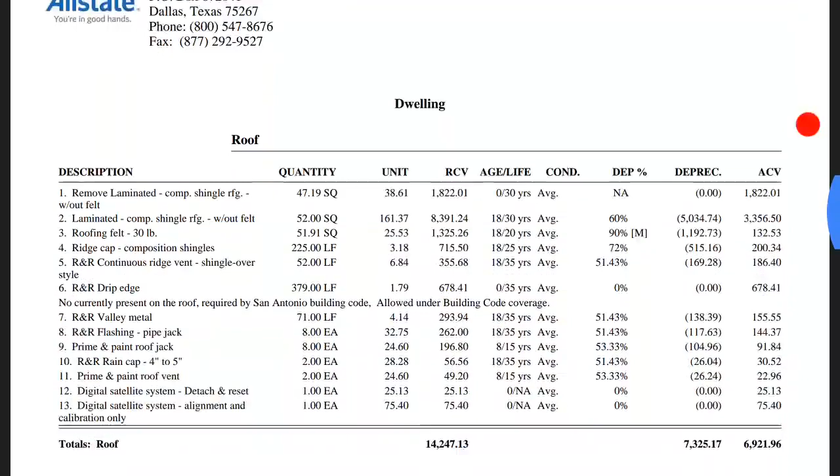It's just a standard laminated composition shingle roof, 47 squares. At first glance, maybe everything's there, right? One of the things to note, and I keep saying this every time...

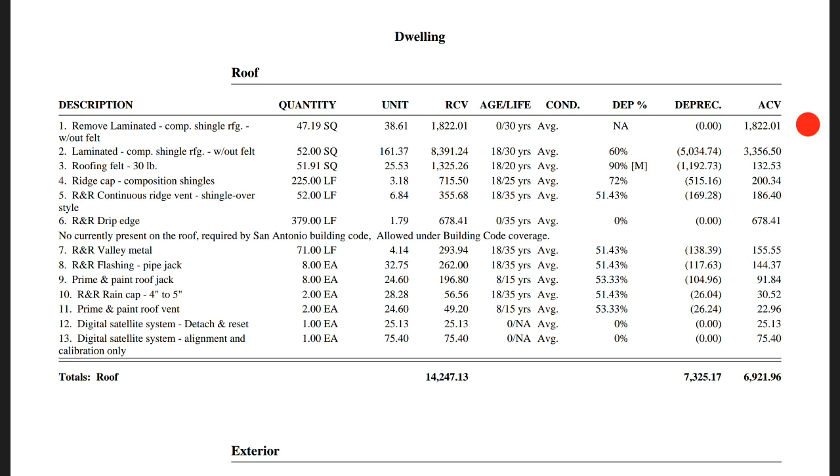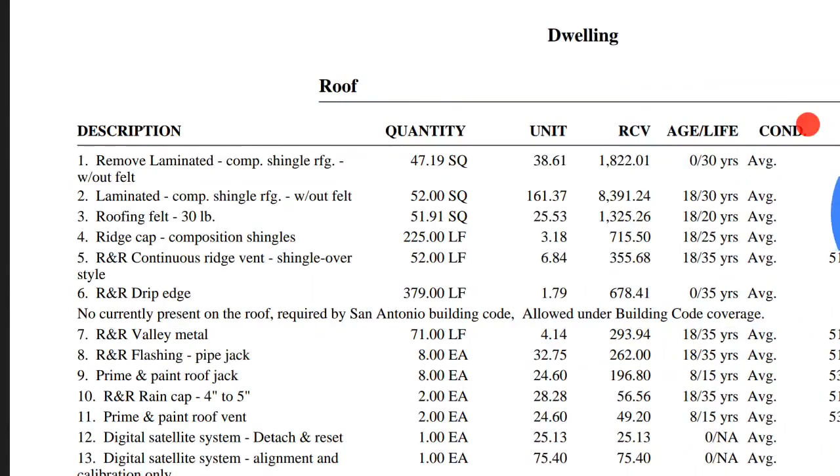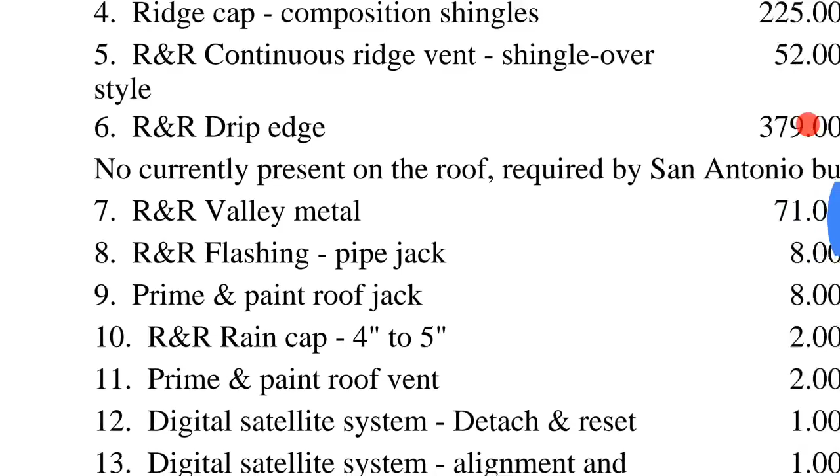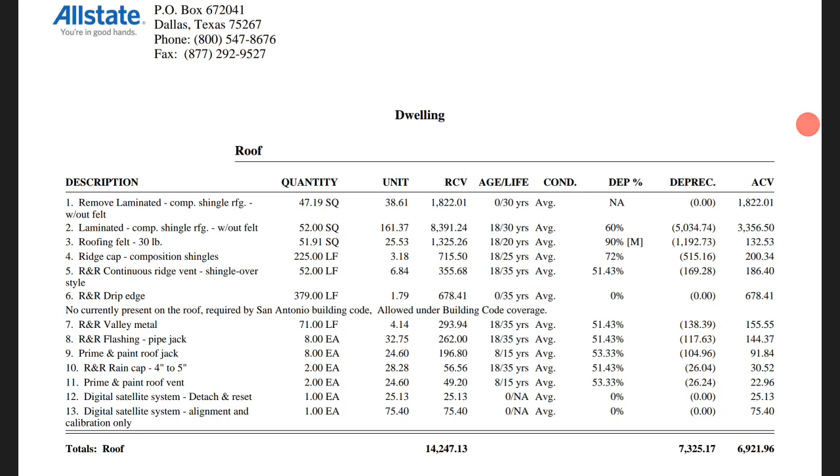You may see where the insurance company has included the drip edge or the pipe jacks, for example. Most State Farm estimates you look at will not have the R&R in front of the pipe jack flashing, or the valley metal. It'll just simply say flashing pipe jack, meaning they're not paying you to remove and replace it. But here's an Allstate estimate written before contractor involvement, so no one asked this adjuster to write it up correctly for R&R on the rain caps, the pipe jacks, the valley metal, and the drip edge.

Even the continuous ridge vent, which usually they don't even pay for the removal of, was included. So no one asked them to do that correctly, yet here's an adjuster that actually did. However, there are still glaring omissions from this estimate. One is a turtle vent, not that big a deal. But also chimney flashing, step flashing, chimney chase cover, and a flue cap. And another huge glaring omission is there's a steep charge on this roof, and it's nowhere to be seen.

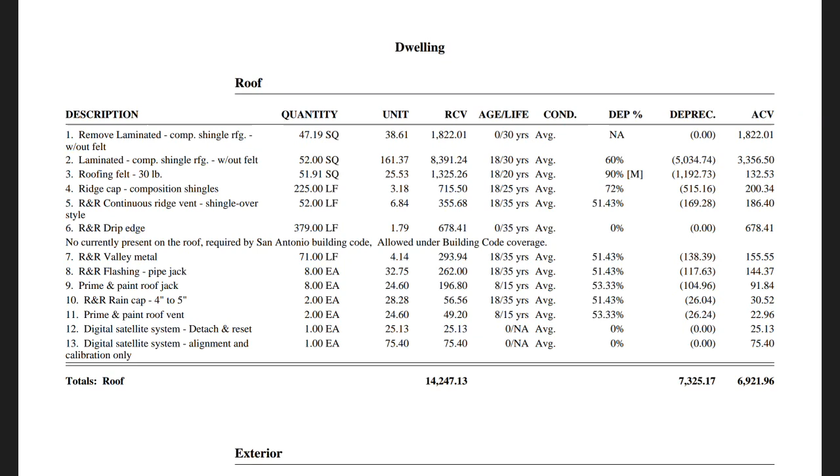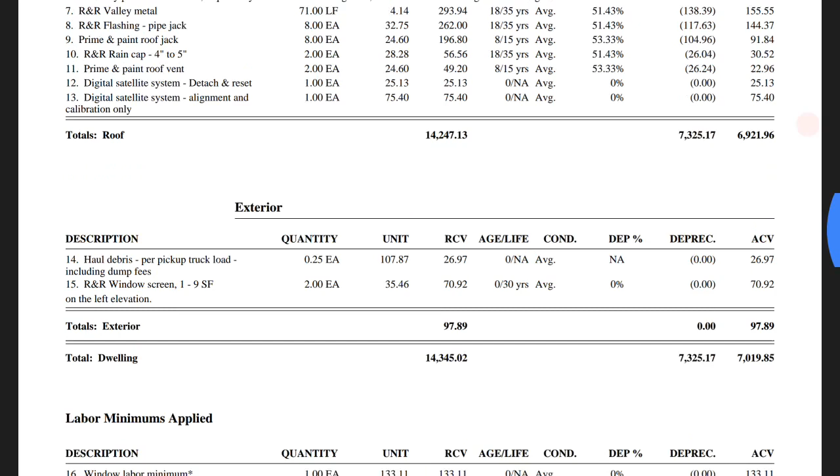Let's see what a big difference that might make. The rest of the estimate's pretty standard. They gave us a quarter of a pickup truck load, which, by the way, is no good. Because if you ask them about the dumpster, they'll say the haul-off is already included with the removal of the shingles, right?

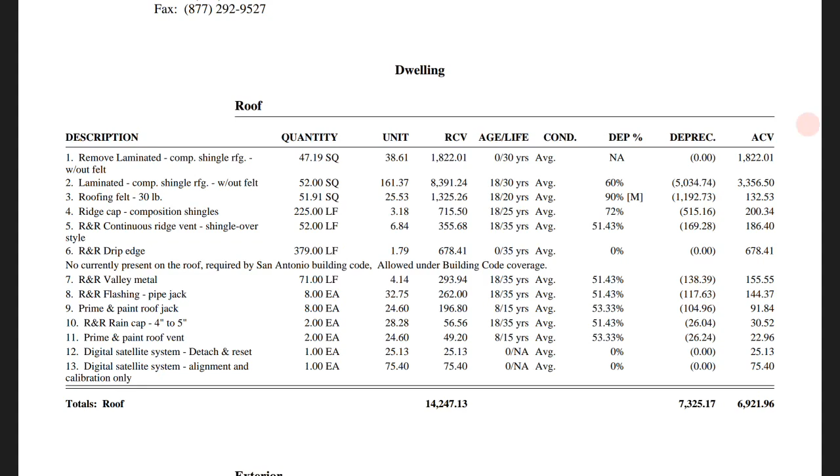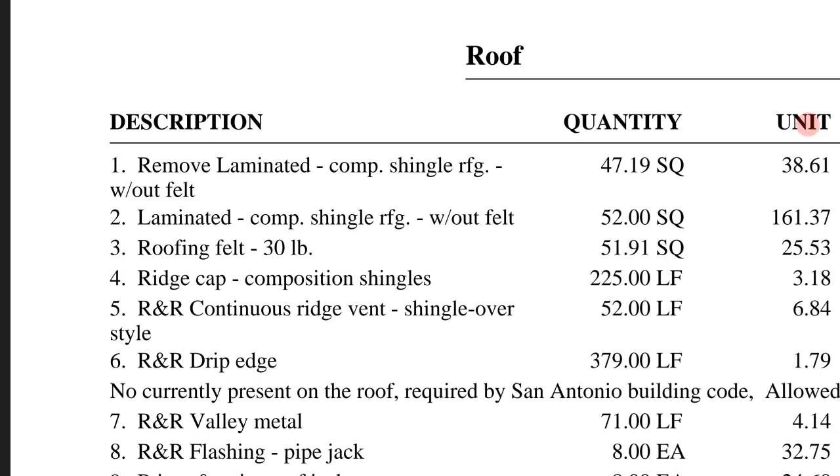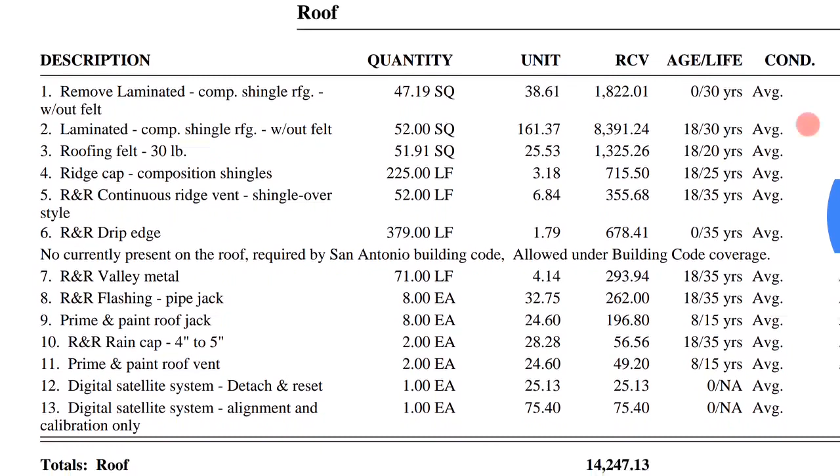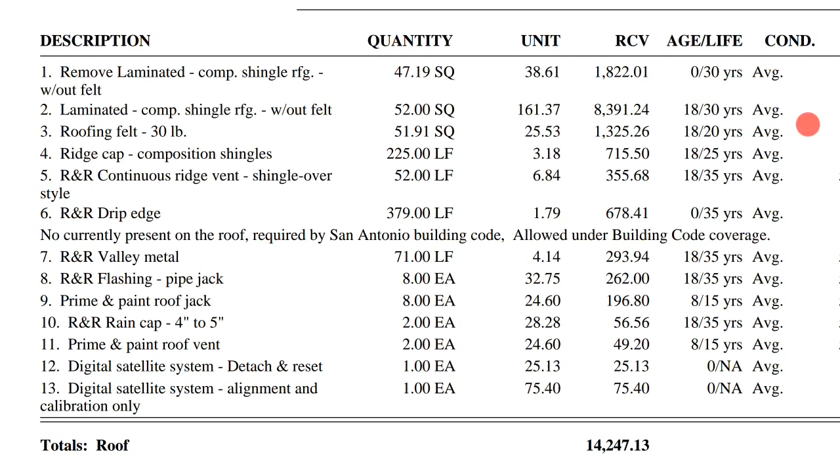So there's line item number one, remove laminated composition shingle felt or shingles roofing without felt. There's another item you'll sometimes see them use, no haul off, which would definitely constitute a dumpster. But just keep in mind, if you ask for a dumpster and they say it's already included in the tear off, it's really only including the shingles and the felt, and the nails. It does not include anything else in this estimate, not the ridge vent, the drip edge, the valley metal, everything else here. So you do need something to account for that. They seem to think a quarter pickup load could account for that, and maybe it will.

Pretty standard job, right? So there's the grand total, 14,478.13. Just some summary pages where they broke it down between the dwelling and other structures.

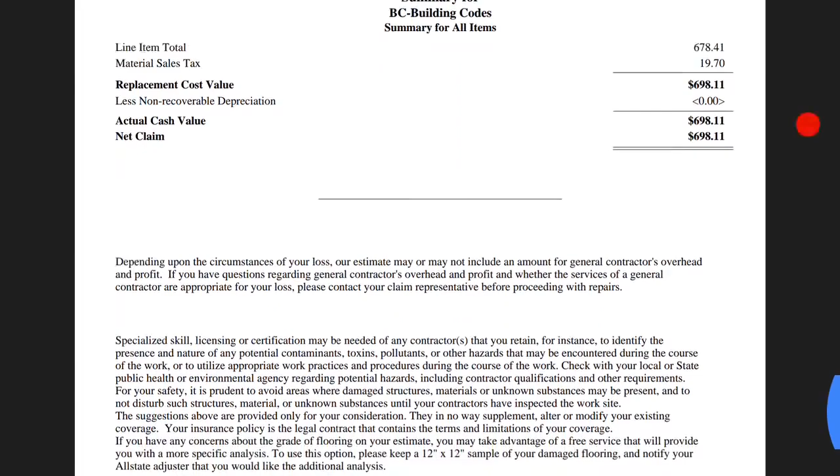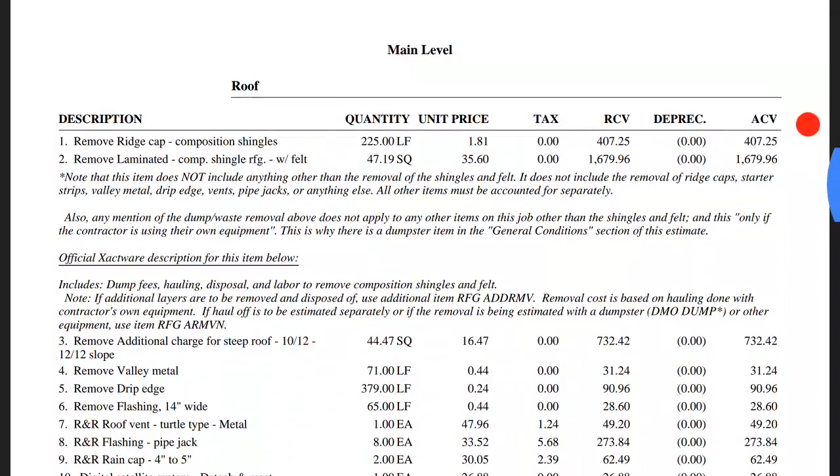Let's take a look at our Xactimate estimate that we wrote for our contractor client, and we submitted it to Allstate. You'll see that it's pretty similar. If you look at it at first glance, you might say, well, that's pretty much the same thing. However, it's very different.

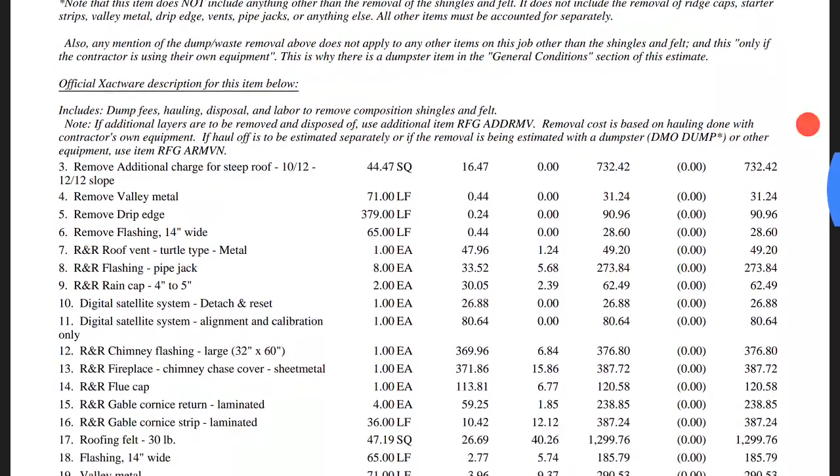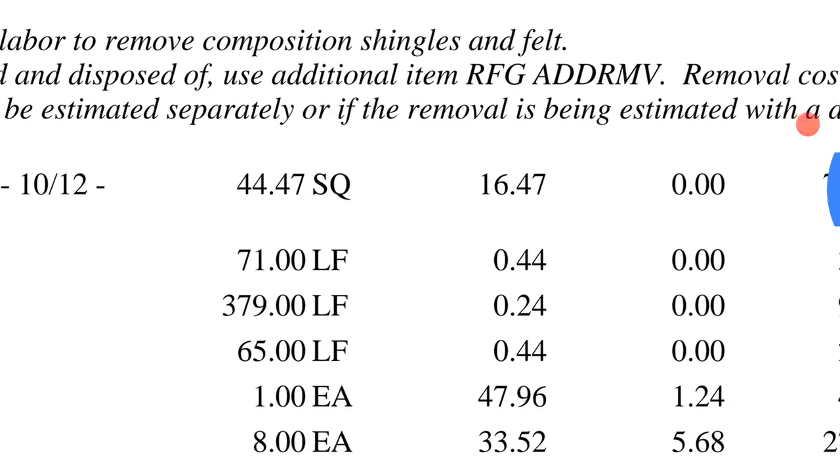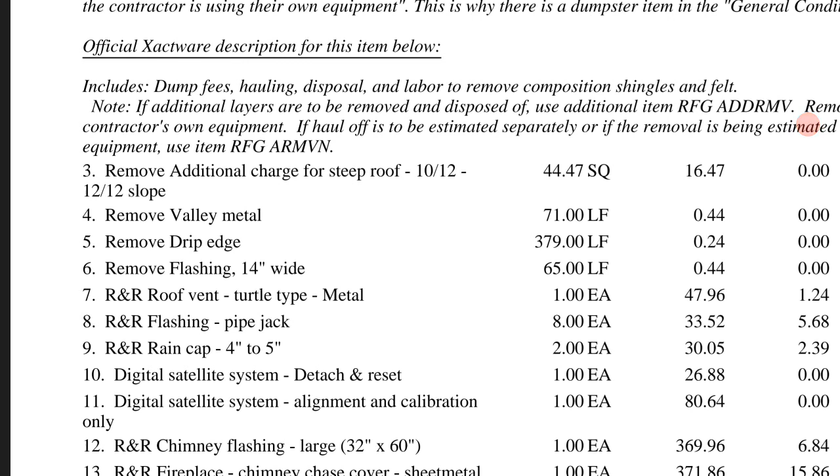We have the steep charge. So that's huge. Look at line item number 3 here: remove additional charge for steep roof, 44.47 squares, $732. That's just to remove the steep charge, which, by the way, even when they do include the steep charge, double check it every single time and make sure they've actually included the removal as well. A lot of times they'll just put the steep charge in there, but they're only accounting for the replacement only. That's why I stopped here, to show you that would actually be worth $732 in this instance.

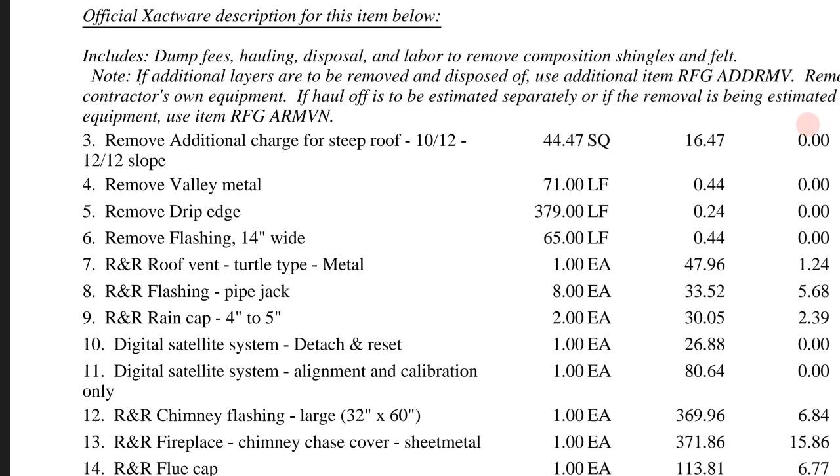I just looked at a Liberty Mutual estimate this morning where that was the problem. They had high charge and steep charge, and you look at it and think, yeah, they've got it in there, they included the steep charge and the high charge, but if they don't actually say remove or R&R, then they're only giving you replace only. So they're skipping out on the whole removal portion of it. With the high charge and steep charges, those things can make a big difference.

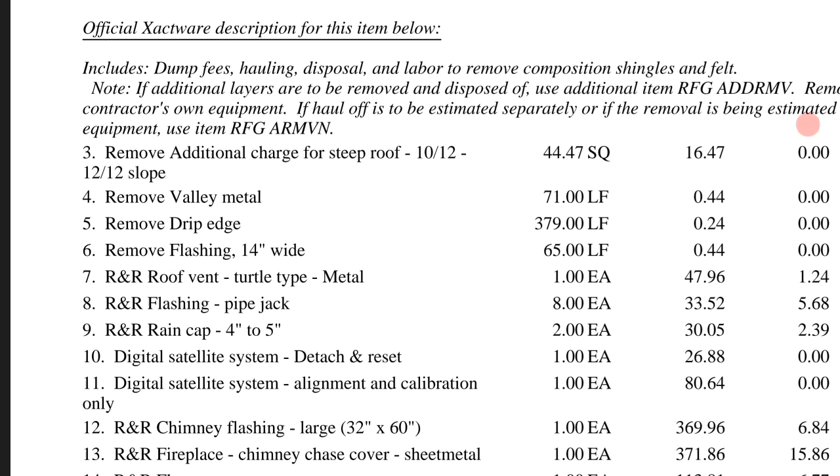So the way that we do our estimates is remove, remove, remove. You may see this and think that it looks a little bit unconventional. There's a method to the madness. I'll just leave it at that, but it's remove, remove, remove.

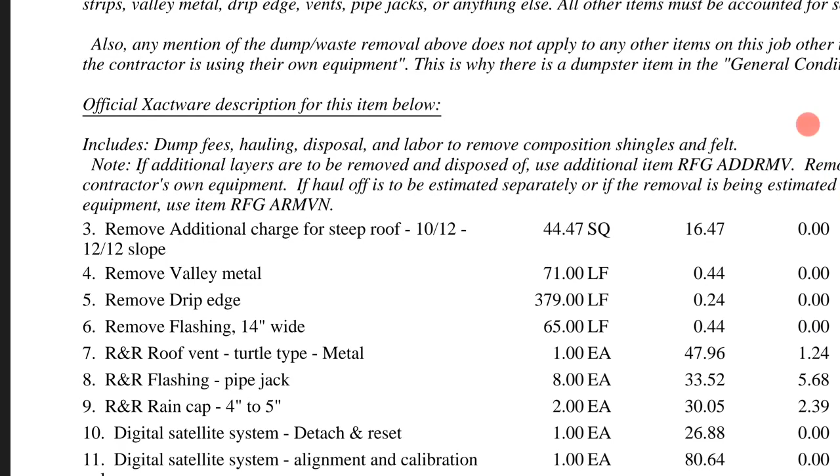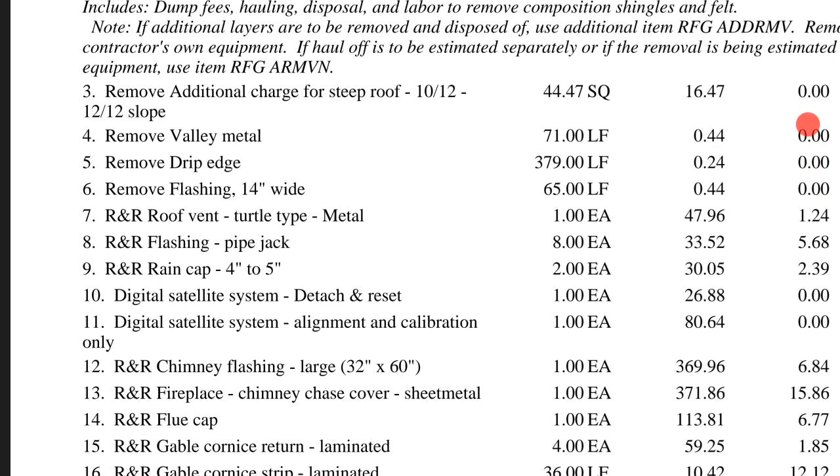Remove the ridge cap, remove the shingles, remove the steep charge, remove the valley metal, remove the drip edge, flashing, which, by the way, they were missing 65 linear feet, remove the flashing, the 14-inch wide flashing. There's the missing turtle vent. 8 pipe jacks was the same, 2 rain caps the same on the digital satellite, detach, reset, align, and calibrate.

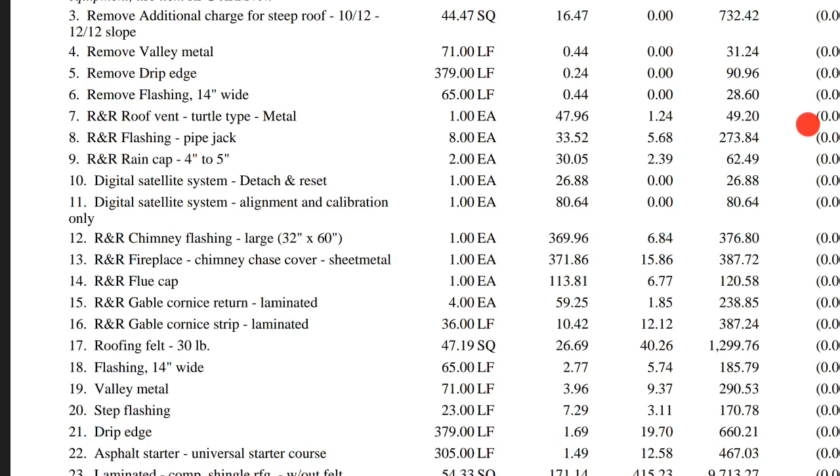And then here are the missing items. We have the chimney flashing, large, so they're missing $376.80. That's a big deal.

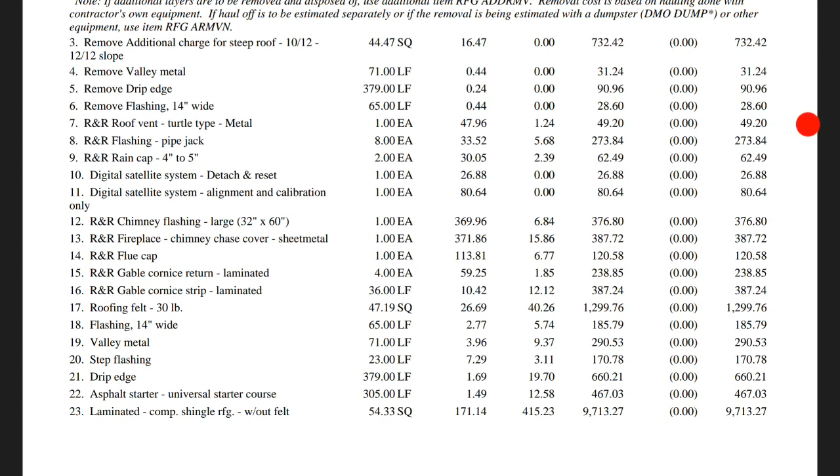And then the chimney chase cover, and I really want to point that out because I see a lot of these jobs that you guys are on, and the photos come back and the estimates come back, and you look at the photo and see that the chimney's really tall, and you just kind of think that no one actually got a ladder and got up there and looked at the top of that chimney. That's why drones are really good, because you can just cruise on up and take a look and take photos, prove the damage, and include it in the estimate. I really believe it pays not only for the sake of giving good service for your customers, but it pays to find a way to get up to the top of that chimney and at least eliminate it from the estimate.

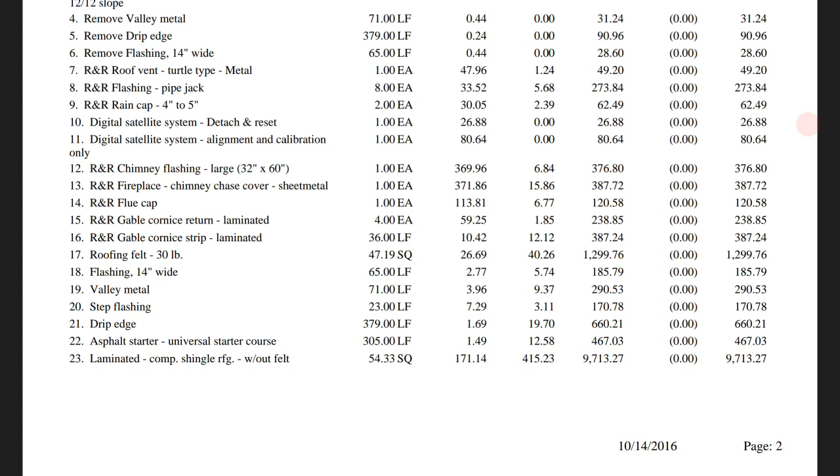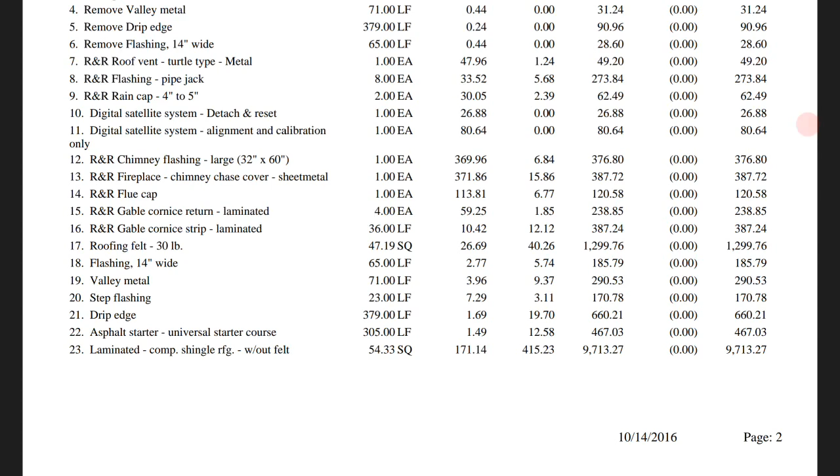But if it has one ding on it, then it's good enough to be replaced. I think most insurance companies would replace it no problem. So in this instance, to remove and replace the fireplace chimney chase cover, line item number 13 here, is $387.72. That's a big deal. And then what typically goes along with that, depending on what's up there, is line item number 14, the flue cap, that's $120.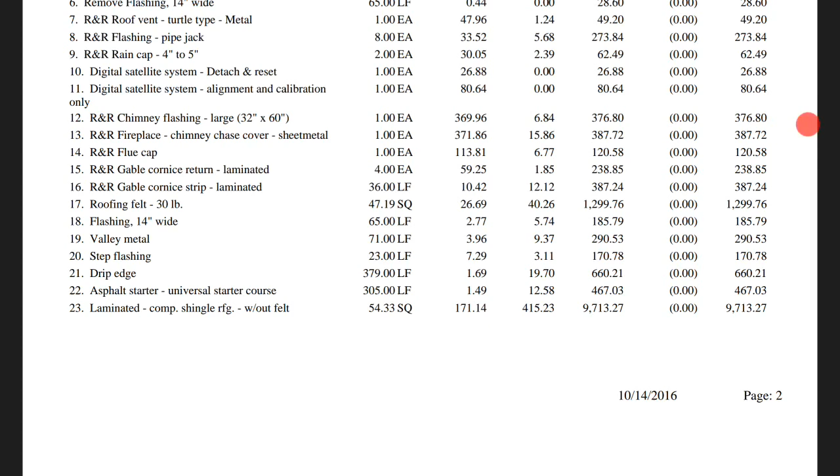Now here's another big one too. I actually can remember this deal on line item number 15 and 16. It was an Allstate adjuster, I dealt with her personally. Gable cornice return laminated, 4 of those, $238.85. And then you have the cornice strip on the next item, 36 linear feet. I remember this specifically because the adjuster, she did not know what those items even were. You could tell she tried to play it off like, looking at a photo of the front elevation of the house, and she says, you have these items in here, why?

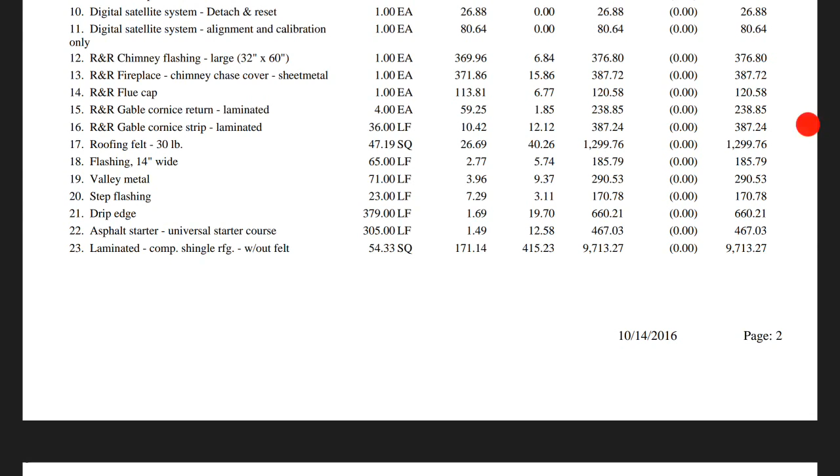Why do they need to be replaced? And were they damaged? I could tell that she didn't know what they were, but I didn't want to call her out on it because I didn't want to embarrass her or ruin the deal we had going.

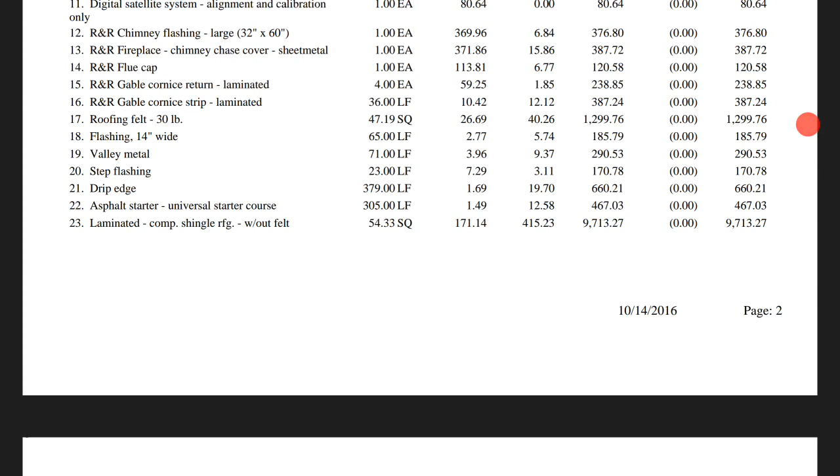But eventually it became clear, so I finally said, 'Ma'am, do you see the triangles, the left and the right side?' She didn't know what they were. Now she knows. They had omitted them from the original estimate, and when we submitted this, she wondered why they were there. Now she knows what they are.

I would submit to you that she's probably going to be paying for a lot more gable cornice returns and cornice strips. They have laminated and 3-tab, and also 2-story and regular 1-story as well. If you don't know what they are, hit the pause button right now and go do a Google image search for gable cornice return. You'll see what they look like, and you'll probably hit yourself upside the head, much like I did when I first saw them, because I couldn't believe how much money I was leaving on the table. These gable cornice returns are on most of your jobs, and you're doing them, but you're not getting paid properly for them.

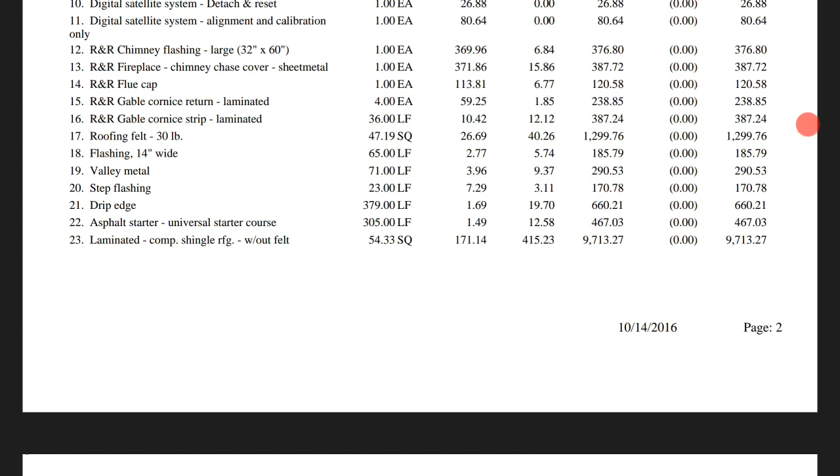What was ironic about that Allstate adjuster not knowing and then learning, is she was the second adjuster I dealt with inside of a week that I had to show what they were. It's easy to do if you're talking with an adjuster, if you're not using a service like ours, and if you're doing it on your own and find yourself in that situation, ask the adjuster to click on the illustration inside of Xactimate, because there are photos there. They're going to feel a little sheepish too, but these are items that should be paid for every time, and they're usually not. They're missed so often.

You can see here those 2 items adding up. That is well over $600. So look at the Google images, you'll see what they are, and from now on those things will start standing out to you. Do the same thing, by the way, with rain diverters, electrical mast, detach reset. There are many items that don't get accounted for, and you just don't think about them. So start really looking for those.

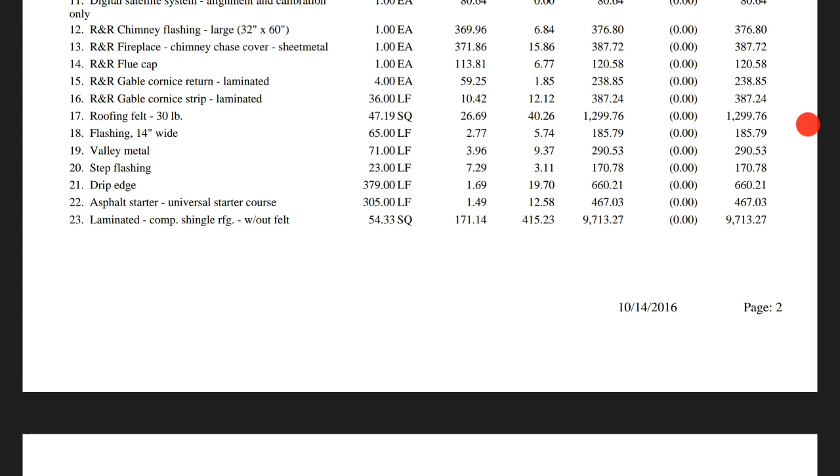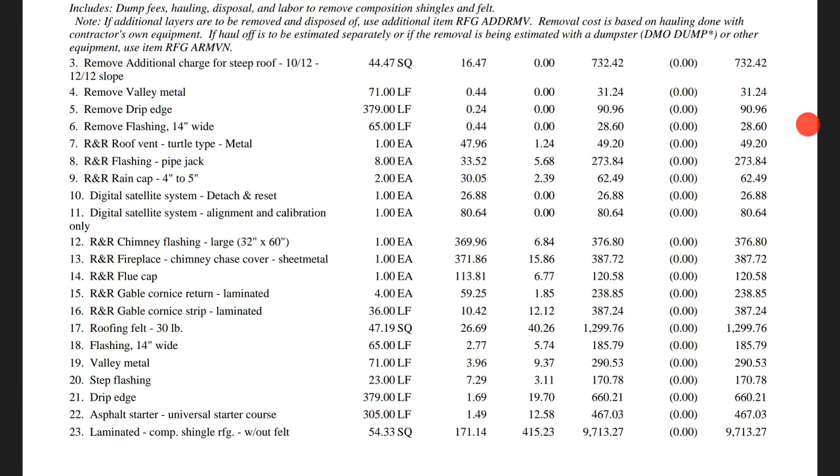Okay, the flashing back on. That missing flashing, line item number 18, was worth $185.79 just to put it back on. And remember, to remove it up here in line item number 6 was $28.60. So the flashing, the Valley Metal, they had that.

The step flashing they were missing. There's no such thing as removal of step flashing inside of Xactimate, so you can only really include for it without the R&R, that's okay, because there's no such thing as the removal of step flashing. But again, $170.78 to do the job right, by the way, and to not have mangled up metal.

And they may say, why do you have this there? What was wrong with the metal? Why do you have the... was the metal damaged by hail? It doesn't have to be damaged by hail, it just has to be damaged. If it's mangled or bent at all during the re-roof process, take photos of that metal. Don't take chances. Do it right. Protect your reputation, protect your warranty.

You know what I did when I was a contractor? I just replaced it every time. I did, and I showed photos every time. And as long as I showed those photos of the in-progress work, they have no problem paying for it, really. I'd say 90-some% of the time they're going to pay for it, and you're going to win overall as a result.

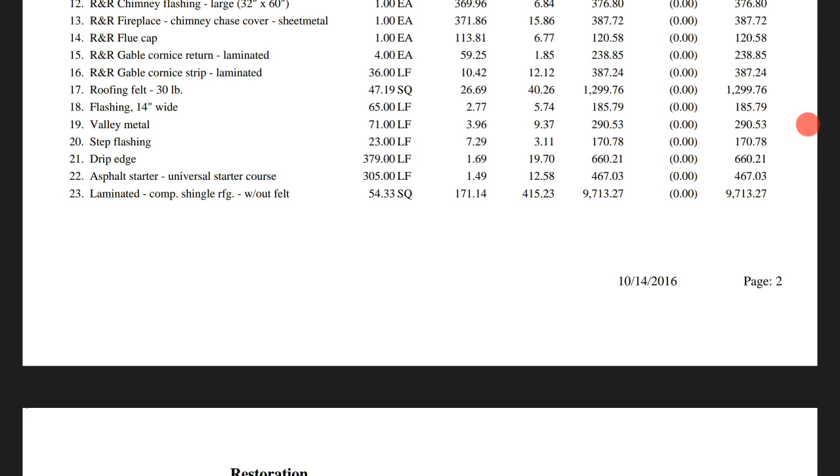Okay, so the drip edge here, I believe this was one where it was required by code, but it wasn't there before, so that's a given. And the starter strip, they're not usually going to pay for—Allstate's not usually going to pay for that. We always put it in with laminated shingles because if an insurance company is going to pay for it, they usually will only do it with the laminated.

And you just never know. Sometimes they'll do it without having to be asked. So what do you do, leave it out? I say put it in because it should be in there. Maybe they back you down, but it's better to back down with it there than with it not there, because they're going to try to back you down on something either way. It's rare that they just approve every penny.

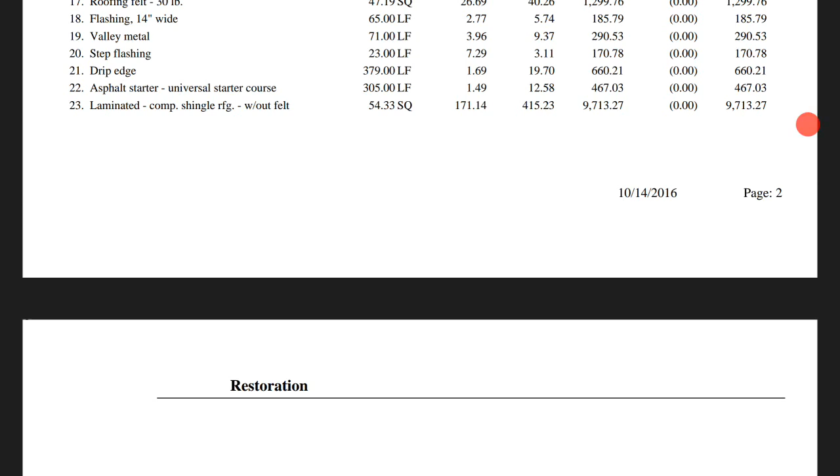It does happen. I have many clients who tell me they approved every dime of it, but it's not usual, not typical, especially not Allstate. They write their own estimates. It's rare that their estimate's going to match yours out perfectly. They're going to try to resist and take off some items along the way wherever they can.

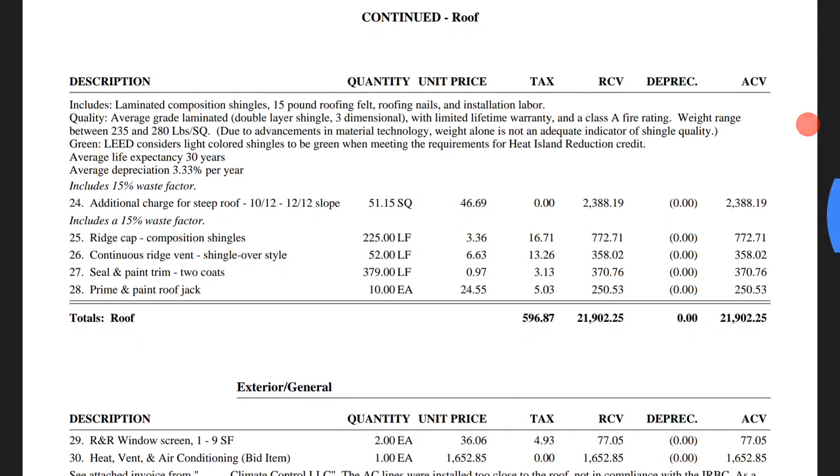So now we have detailed footnotes showing what's included with the shingles, additional charge for the steep roof. Look what they were missing - they were missing $732 for the removal of the steep charge, and look here, $2,388, oh my goodness. So over $3,100 missing just because the adjuster failed to include the proper steep charge or any steep charge at all.

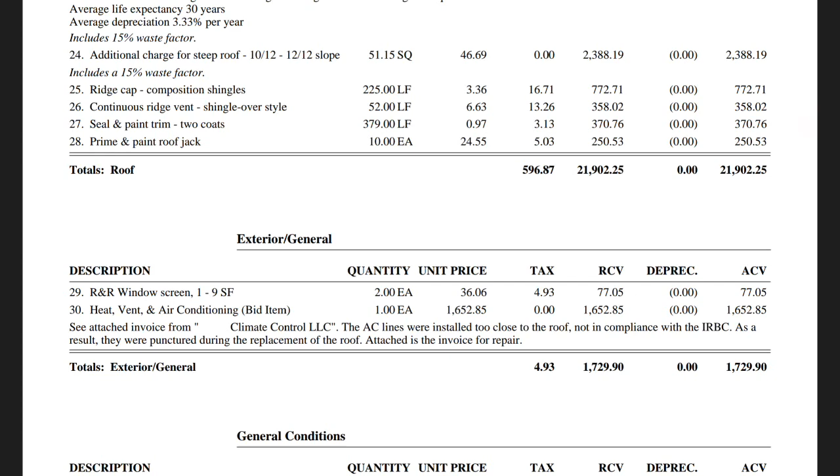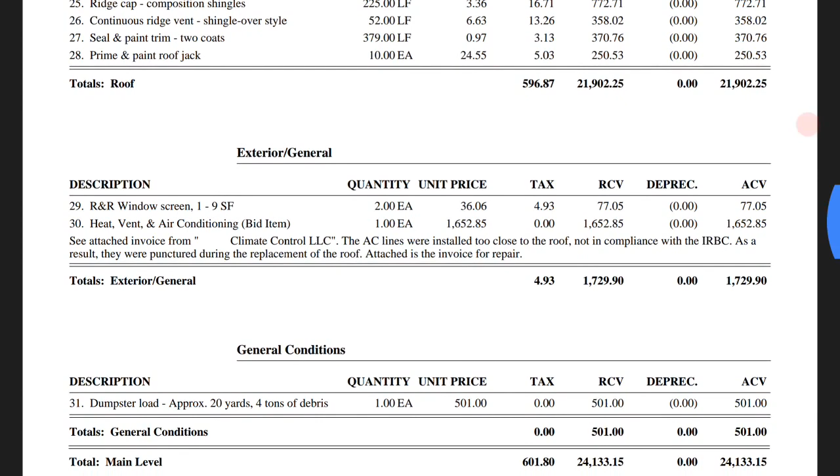Ridge caps - for the adjusters that say, 'Oh no, the ridge cap's already included,' look at that, $772. I don't think the ridge cap is included. Continuous ridge vent, seal and paint trim, prime and paint roof jacks, window screens.

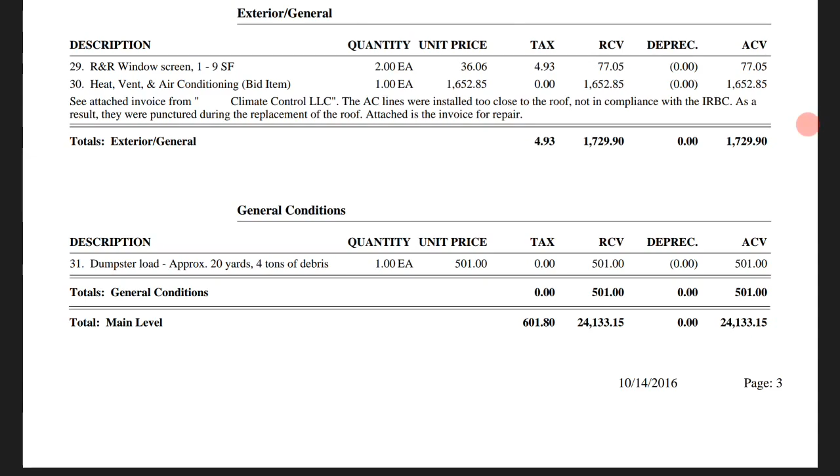Okay, now I want to stop here. This is a bid item, number 30. This is a bid item. What happened on this deal is - I'm just going to skip ahead to show you, then come back, so bookmark that - they had to get an HVAC company to come in, and they paid $1,652 to fix the line that was pierced because the line was in the wrong place. So kind of a causation issue there, and you may have mixed results on it, but here's an example about simply documenting it correctly.

So see attached an invoice from - we whited out the name of that company. The AC lines were installed too close to the roof, not in compliance with the IRBC. As a result, they were punctured during the replacement of the roof. Attached is the invoice for repair. It doesn't have to be that much more detailed than that. Give them the documentation, show them that it was an incurred expense.

In this case, this job was done, so show them that it was an incurred expense, and I submit to you that you should be able to have decent results most of the time. So general conditions, we put in for a 20-yard, really maybe a 12-yard might be sufficient. I think in this case they didn't give us any more than where they were at to begin with.

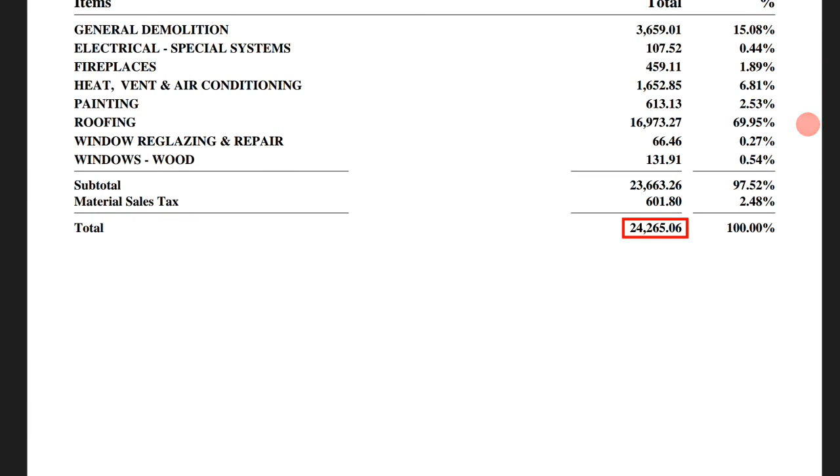But our estimate on this was a total of 24. Just wanted to go to the bottom where we had highlighted - 24,265.06. And to recap, we started from there, so it's like plus 10,000.

Price gouging, right? Excessive? I don't think so. Once you really look at the items that are there, which items would you have me hold off on? It's a good thing you would not have me hold off on them, because look what we were able to obtain as far as results.

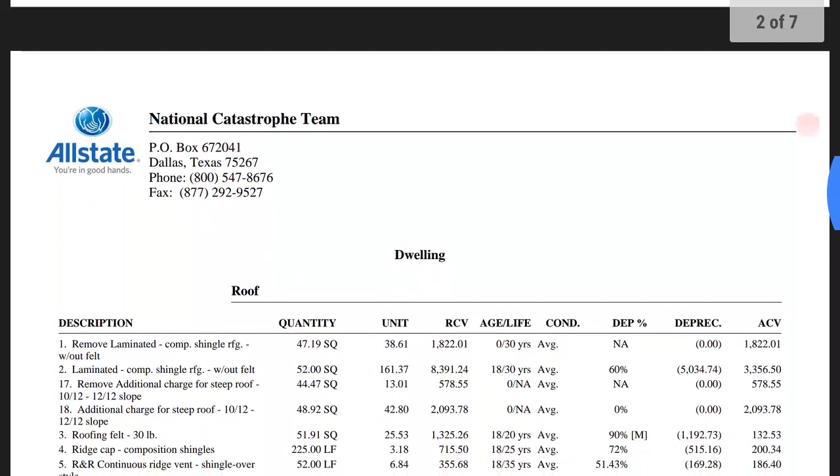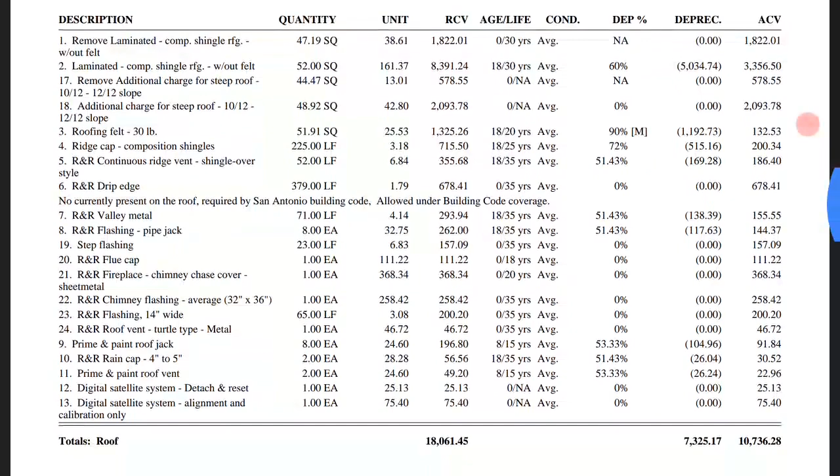So here's the final. You see a lot of the same items that were already there, but now we have the removal of the steep charge and the replacement of the steep charge. We have the drip edge, the fireplace chimney chase cover, the flue cap - sorry if I'm not going in order, I'm just reading them as I catch them - the step flashing, the flashing. So basically line items 19, 20, 21, 22, and then 24, the turtle vent, was included.

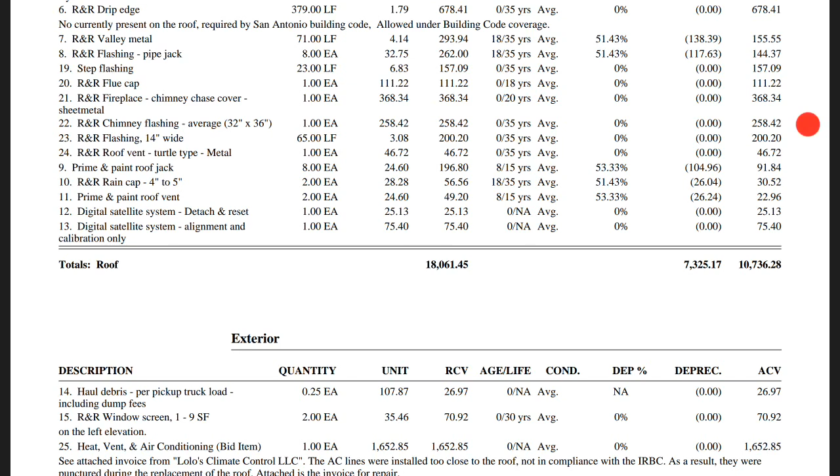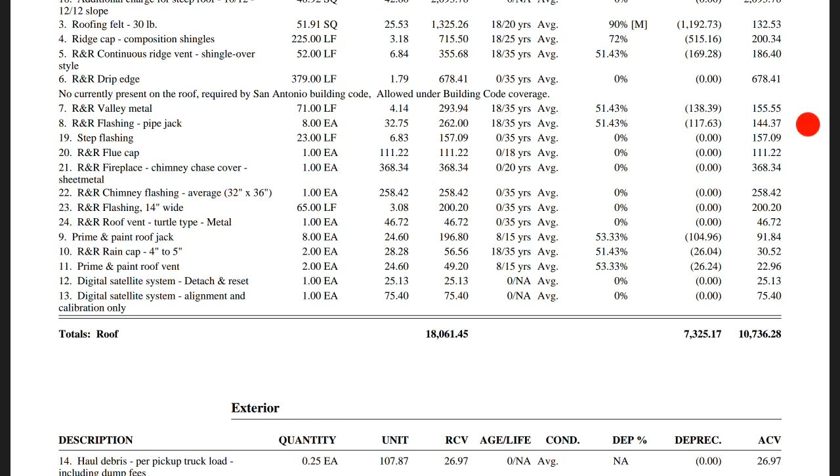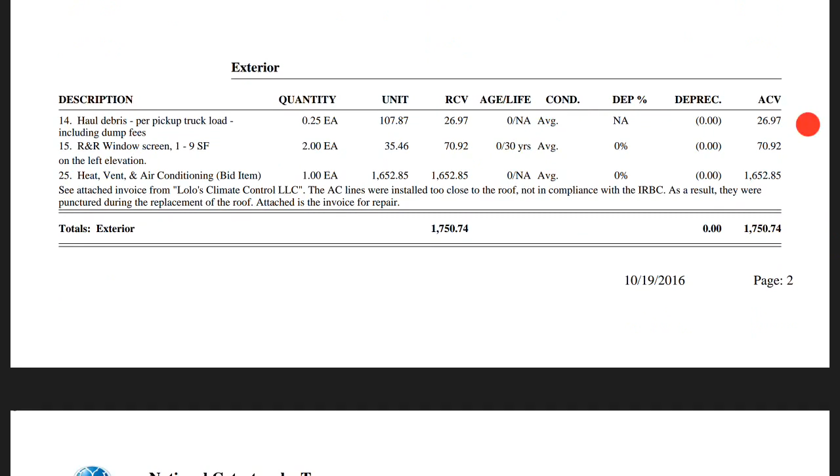So just showing proper documentation after this job was done, like I said before, the proof is in the results - what I said was not just hot air. Just document it and show the results, and you can get results. And then here we have the line item or the bid item for the climate control company - we whited out their name in the other part, but you can see it now.

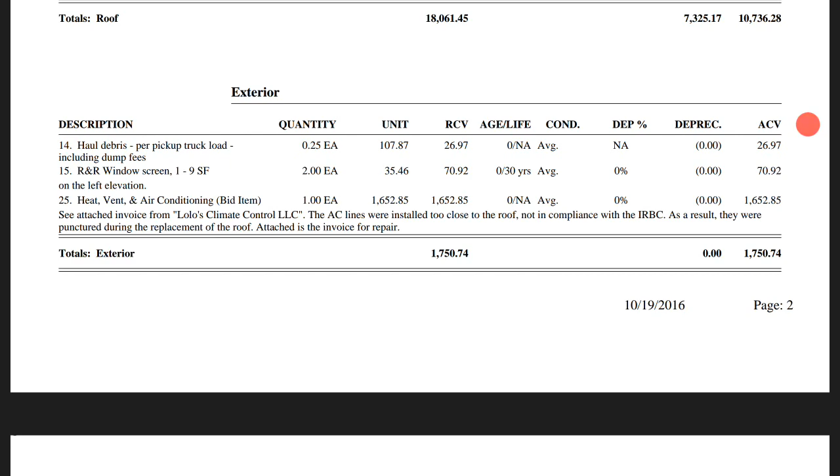Not that big of a deal, really. The climate control company, the AC company, basically copied what we had in our estimate and paid it. So that was included, no problem there. I don't remember her ever asking why we had to do that. It was pretty much self-explanatory.

So anyway, this is a very simple job. There's no O&P. You could fight for it if you want to, but I don't do it when it's just a roof like this. The reason is we got this approval inside of a week, maybe two weeks. Because we didn't try to go after the O&P or every last little item, check it out, there's the results.

20,453.95. So are you a contractor? Would you be happy with those results? I think you probably would.

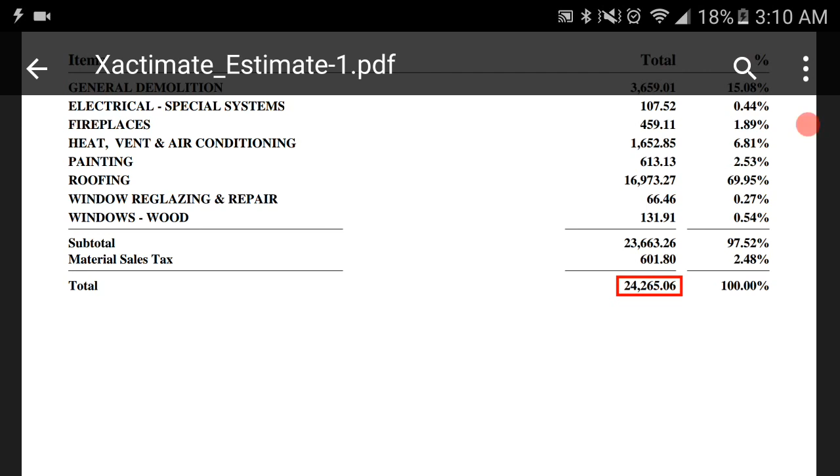So to recap here, we have the original Allstate estimate at 14,478.13. We submitted an estimate for 24,265.06. And the final results after a week to two weeks, 20,453.95. Now listen, that's an average type of result.

But sometimes you're going to get an extra 3,000. You might get an extra, we need to make a video about the small wins where we get an additional 800. We just had one of those this morning with Farm Bureau, I believe. So $800, but that was pre-billed. We'll take pictures and document some of the things they're not willing to approve right now, and they will on the back end.

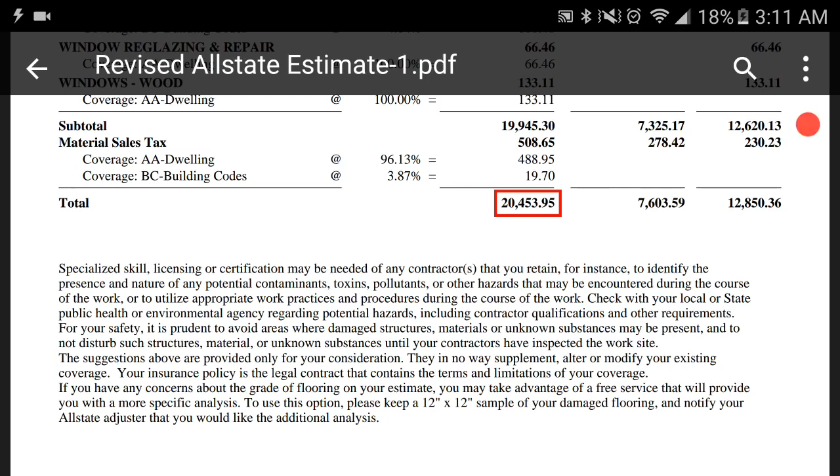And sometimes you'll get 15,000. Go back and watch episode number one where we started. This was a huge home run where it started out at, I think, 29, and we got it approved at 57. So that was a big win. Sometimes you smash it out of the park.

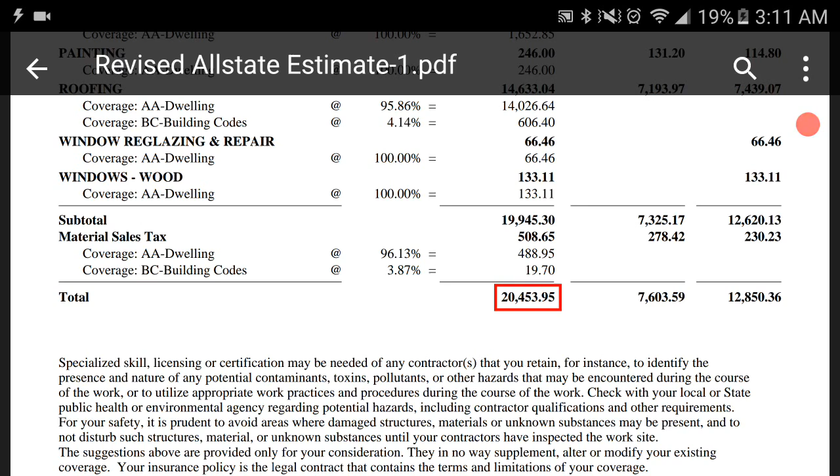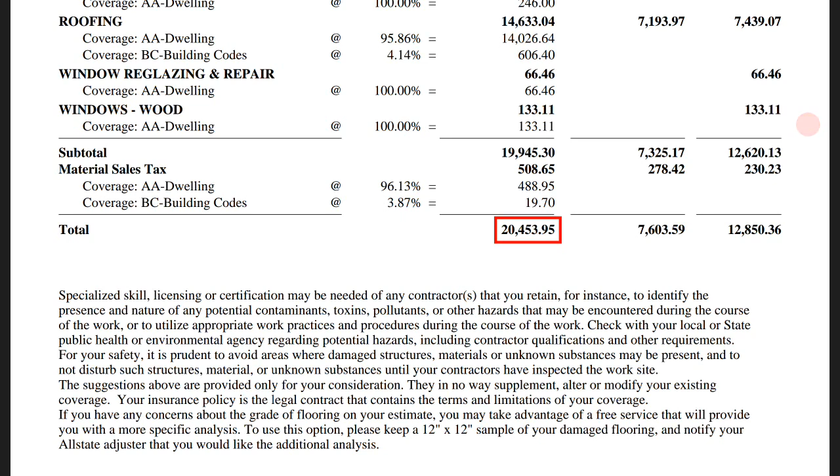Very rarely do you just lose where they deny it altogether. And they may deny it altogether, but you just go back another round and try again. And then, of course, there are other solutions available beyond that, such as appraisals, and there are public adjusters out there you can link up with your customers who are awesome at what they do. But there are many steps you can do on this level before you have to go there, so I think you should try to exhaust those before you escalate it.

If you can get this in one week or two weeks, that's great, right? Some deals might take three to four weeks. Some insurance companies take much longer than others. Some Allstate claims might take three weeks, where this one was closer to one. So every deal is different, every insurance company is different, every insurance adjuster inside that company is different.